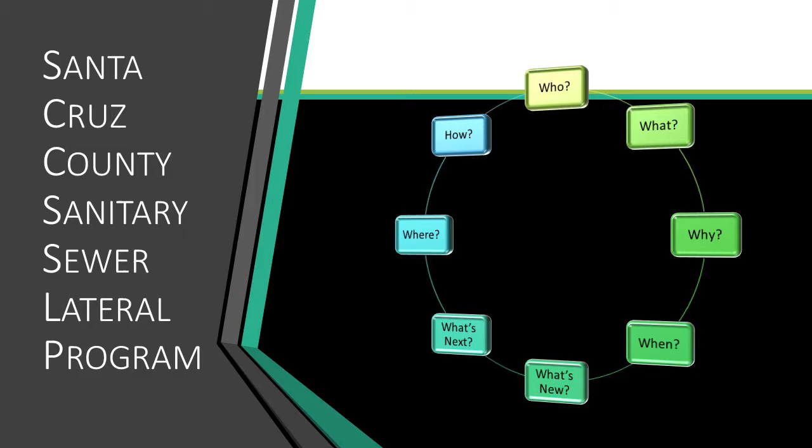Hello. This presentation is to go over highlights of the Santa Cruz County's sanitary sewer lateral program and some changes that we've had that will hopefully improve the program. We're going to go over the who, what, why, when, what's new, what's next, where, and how of the program.

First, I want to talk about who weighed in on the changes we've had to this program. When this program began, it was very new to everyone, and there were a lot of challenges that we had to overcome. And during that time, we had a lot of feedback from different homeowners in the community. We met multiple times with realtors in big groups and also one-on-one to get their feedback. And we met with plumbers who were out doing the inspections and repairs and got feedback from them.

We also incorporated feedback from our own staff who talked about how we could better process all the documents that were coming in and things like that. So we had a lot of people that weighed in on these changes, and the program is running a lot smoother, and I hope it works a lot better for all those involved.

So who does this program affect? Everyone that owns a property within one of the districts that the county manages, which include the Santa Cruz County Sanitation District, the Freedom County Sanitation District, the Davenport County Sanitation District, and the 5 community service areas. Those are all areas where the county manages the sewer system. And so if you have property in any one of those areas, you must comply with the county's sewer lateral program.

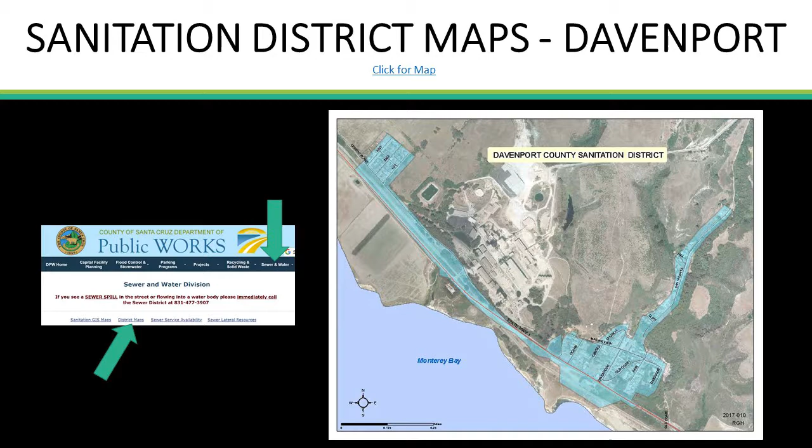The Davenport County Sanitation District is shown on this map. The Freedom County Sanitation District is in 2 separate pieces, so that is an area where you'll definitely want to check to see if the property lies in the sanitation district, or if it is in the city of Watsonville's jurisdiction. And then we have the maps of the different community service areas, or CSAs.

So what is a private sewer lateral, and what is a private sewer collection system? What are the responsibilities of the owner of a private sewer lateral? And what is the county's new and improved sewer lateral program? The code was a bit confusing before we made these changes, and we've worked hard to more clearly define the responsibilities based on what kind of sewer system you own on your property.

So a sewer lateral, the definition of that is: underneath the building and within the house you have what's called the house plumbing or the building sewer. We don't have jurisdiction over that. But as soon as it comes out of the building, past the building face, you enter into what's called the private sewer lateral. And the homeowner or business owner owns that entire lateral until it connects to the public sewer main. And they also own the connection to the main.

So you can see in this diagram, there's the public sewer main down there out in the street. And from where the pipe leaves the house, right at the edge of the building, all the way to where it connects to that main, including the connection, is the private sewer lateral. Maintaining it and repairing it is all the responsibility of the owner of that property. And you can also see there's a clean out. Lots of times there'll be a clean out right by the building. It could also be behind the sidewalk. Sometimes a clean out was not installed.

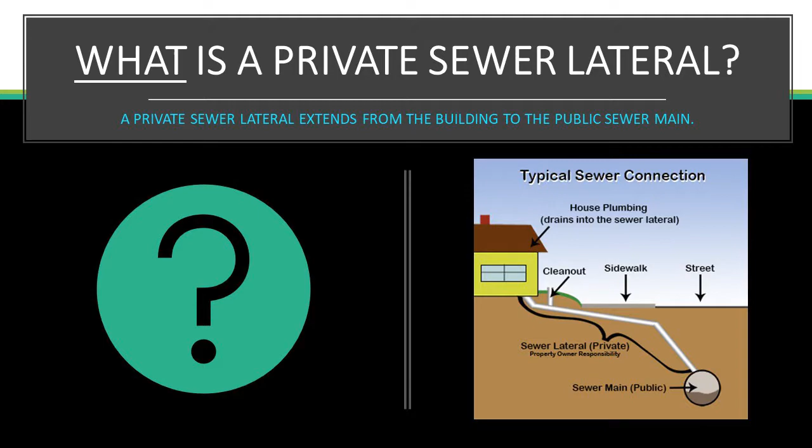We do require a clean out be installed, but sometimes they're not there. And to get your sewer inspection, you may need to have the plumber first install a clean out because you know it's going to be required by us anyway. Or they could take off a toilet and do the inspection that way, or go through a roof vent.

So another definition that's important to know is a private sewer collection system. A private sewer system that serves 4 or more units is called a private sewer collection system. So right here you see this development with all the different lots. They all have little connections to these main lines that are highlighted in yellow. And all those lines are what is the private sewer collection system.

The county does not maintain those lines or repair those lines. Those are the responsibility of the people who live on that larger property. And then that system ties in to our system down in the main line out there in Capitola Road. That's where it connects to the public system, and that's where our responsibility begins.

And so sometimes each homeowner is responsible for certain portions of the private collection system. Other times an HOA or someone's responsible. So that's defined in the CC&Rs for the property, hopefully. And there's a lot of different arrangements for that. But what you need to understand is that there are 4 or more units connected to these systems. If there's less than 4 units, it's called a shared sewer lateral.

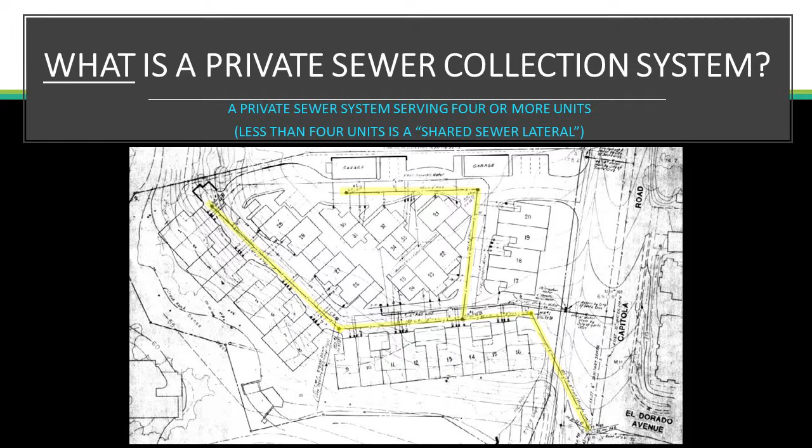So here's 2 diagrams showing a shared sewer lateral. And you can see that both Unit 1 and Unit 2 are tied into this lateral. And our code requires that when an inspection is done on a sewer lateral to meet the requirements of the sewer lateral program, the homeowner needs to video their entire lateral to where it connects to the public main.

So in this first picture, if Unit 1 was going to sell, they would need to video, I have a clean out here outside the house, and they need to video the whole red portion all the way to the main. And they would need to fix anything wrong in that part because they're responsible from their house to the main, unless there's some sort of written agreement between those property owners that says otherwise. But in an instance where there is no written agreement, per our code, that is their responsibility.

However, if Unit 2 were to be for sale and Unit 1 is not, and they need to do the video inspection and repair on their lateral, they would video from their clean out right by their house. They're responsible for the piping outside their unit all the way down to where it connects to the main. So again, it's all the way to where it connects to the main. So you can see there's some overlap there.

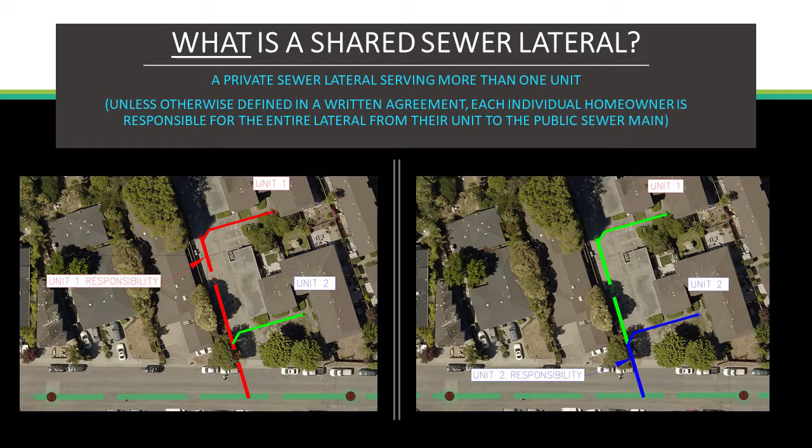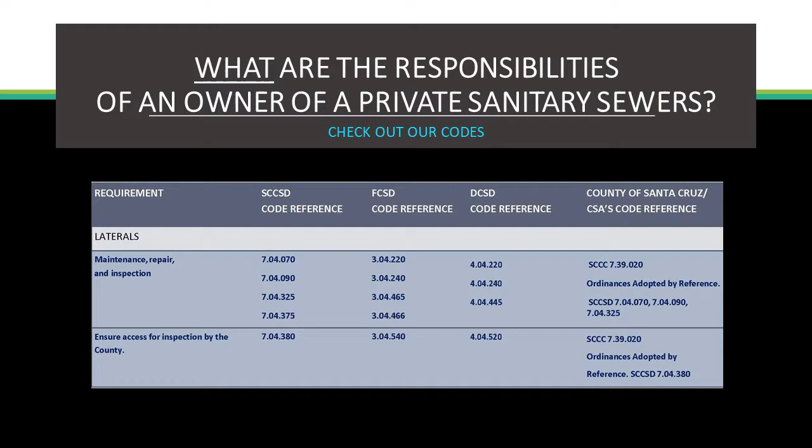So for the owners of private sewers, so this is owners of private sewer laterals, owners of private collection systems, owners of shared sewer laterals, all those people are owners of private sewers. So what they need to do per the code is maintain the private sanitary sewer collection system and private lateral in a fully functioning condition and ensure that the lines are free of cracks, fractures, leaks, inflow, infiltration of extraneous water, root intrusion, and open joints.

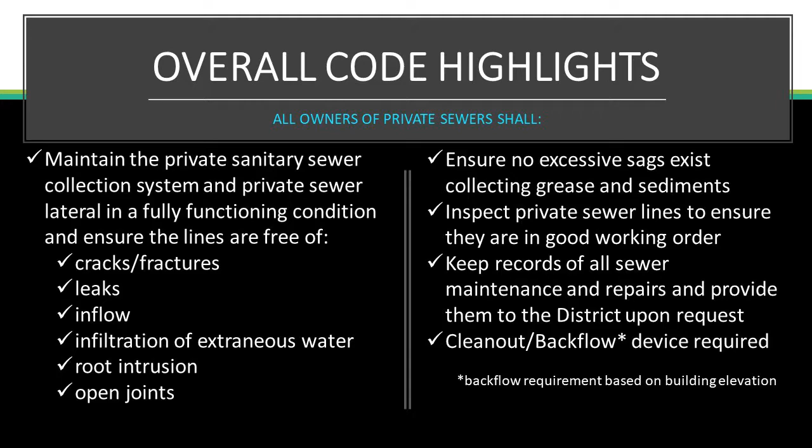They need to ensure that there's no excessive sags that collect grease or sediments in the line because that can cause backups. They need to inspect the private sewer lines to ensure that they're in good working order, and then keep records of all the maintenance and repairs and provide them to the district upon request. And a clean out is always required, and a backflow device may be required based on building elevation. So I'll talk about that here with our next slide. So these are some pictures. This top one is a clean out before it's been backfilled.

You see the sewer lateral coming across the lawn with the clean out sticking up there. And the clean out is a way for the plumbers or the homeowner to access the line, to do inspections with a camera, or to flush it out, snake it, things like that. It's also a place where if there is a problem in the sewer and sewage starts to back up, hopefully it will back up out of there.

And so one thing you can do to protect your property is install a backflow preventer. And we require these when the lowest finished floor elevation, so your first floor or your basement if you have one, if it's not higher than 12 inches above the nearest upstream manhole, you need a backflow preventer. And this helps keep sewage out of your building or your residence if there is a problem in the line

that causes a backup. So there's a flap that you can see in this diagram, and as the sewage backs up, the flap closes, and then the sewer will back up either out of the clean out or some other place that isn't inside your house. So we always require that every house has a clean out, and then again, based on elevation, a backflow preventer might also be required.

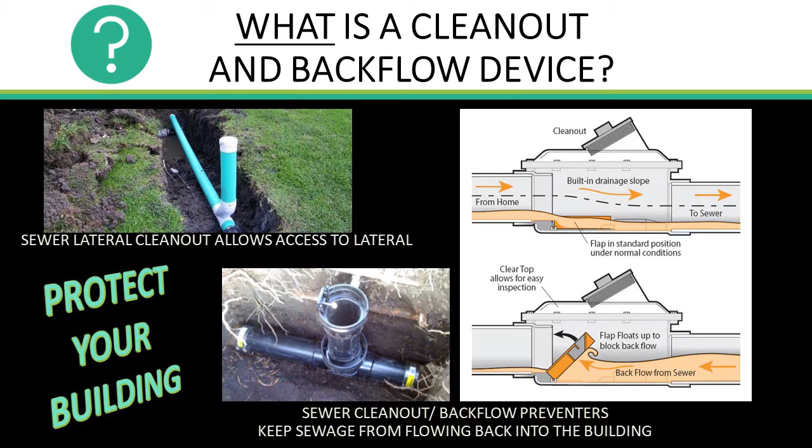Now, what is the county's sewer lateral program? So it is verification of proper sanitary sewer function through video inspection by a licensed plumber with completed lateral inspection form, county review of the provided video and inspection form, required repairs by a licensed plumber, and county approval.

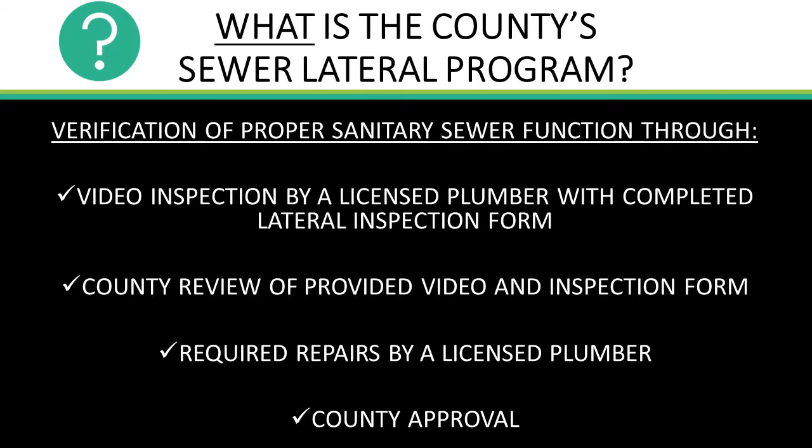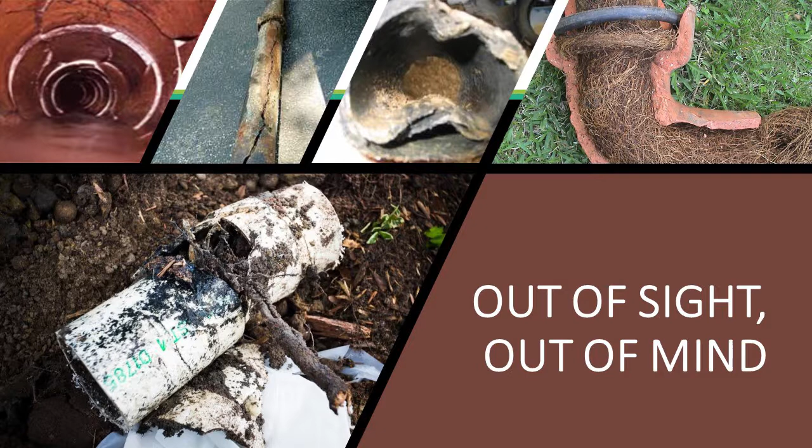And why? Why does the county need a sewer lateral program? And why does the county care about private sewer laterals? You might think this because it's on your property. It's your responsibility to repair and maintain it, so why does the county get a say? And the reason is that things that are out of sight are out of mind, and they are deteriorating and they're causing problems for the overall system.

So here you can see some things that could happen. There's a clay pipe that's crushed. It could have been backfilled improperly and maybe in a shallow trench and driven over by vehicles, or there could be a tree that's causing it to fracture. Then you see a cast iron or steel pipe that has rusted out.

You see this next one is Orangeburg. It was a pipe material made out of tar paper that they thought would be a good idea, but it really wasn't. And everywhere it exists right now, it pretty much needs to be replaced because it's just all falling apart. And then you see this clay pipe that has just been completely filled with roots.

So roots will look for any way to get in through a crack or a fracture or through a joint that isn't done well. And once they get in, they're thirsty, they're looking for the water, and then they find the water along with a lot of other yummy stuff in your sewer, and they grow and grow and grow, and they can fill up the pipe like this.

And some people might say, well, my sewer lateral is made out of plastic. It's PVC or ABS, so roots aren't a problem. And while they are usually really good pipes that hold up and don't have much chance for roots to get in any cracks, if there's an improper joint or other defect in the pipe, a root still could get in and cause a problem.

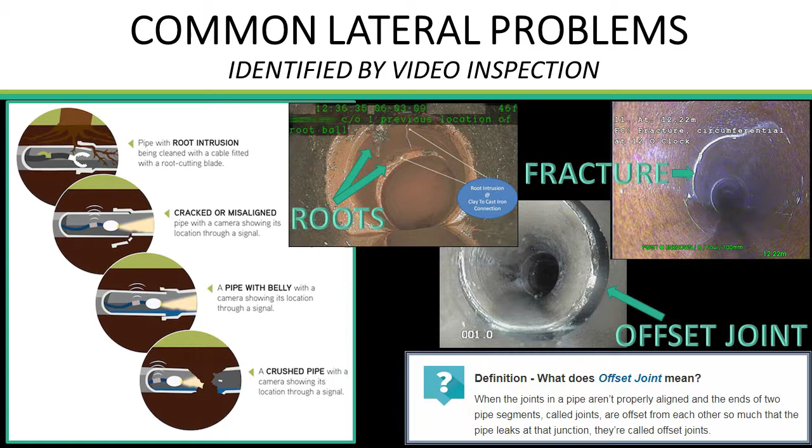And why does the county care about the private sewer laterals? Well, we need to eliminate inflow and infiltration. So of course we also want to eliminate exfiltration, which is sewer getting out into the groundwater. But it's also important for us to eliminate the inflow and infiltration.

So inflow is shown in this diagram in black. It's direct water just flowing into the system from stormwater. So there's a roof drain connection, there's a foundation drain connection, there's an uncapped cleanout that water can get in, and a faulty manhole cover. There's even a cross connection out there with the storm drain.

So the storm drain water is going directly into the sewer. So these are all cases of inflow. We're also trying to get rid of infiltration. That's when groundwater can seep in through different cracks in the pipe or faulty joints. So they're shown here in the diagram in the white text.

It's the broken side sewer where you have the root intrusion, because if roots can get in, water can get in, and also sewage could get out. And then there's a faulty lateral connection. A lot of times that is where we see repairs needing to happen, where the lateral connects to the sewer main. It was done a long time ago, or wasn't done properly, or the materials used may have been an old technique or something that isn't watertight. And so that faulty connection could also be a source of infiltration.

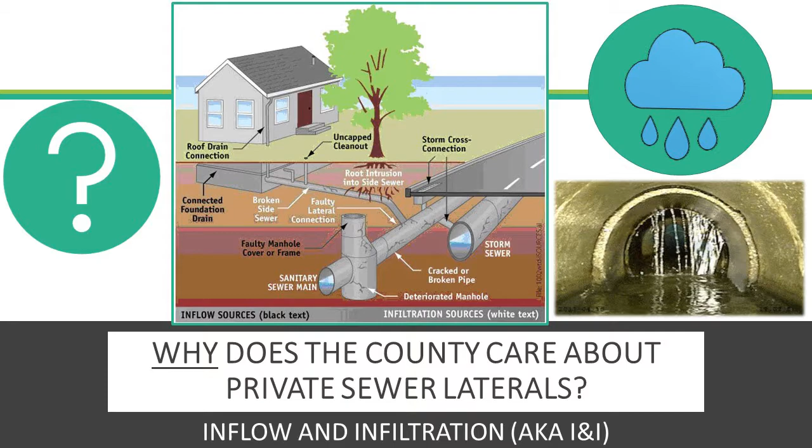So it's really dangerous for our environment, for public health, and also it's just really expensive because we have to size all of our sewers for all this extra water. We have to maintain these huge lines, and then we have to pay either the City of Watsonville or City of Santa Cruz to treat all of this sewage, and it's much larger quantities than what we call our dry flow, which is the flows that we see in the summer months when there isn't rain.

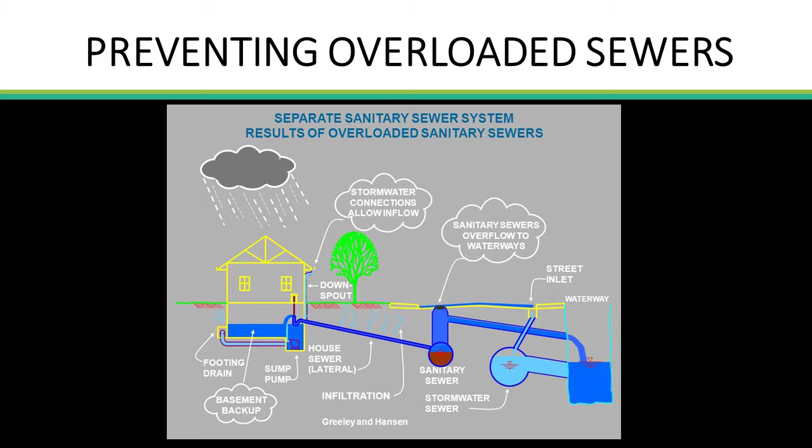If the water gets up to the inflow pipe elevation, then it can spill out the manhole in the street, which is what you see in the next picture. And of course that can go into the storm drain systems and pollute our waterways. And it can also cause backups and go into your residence. So there's some really nasty sewage there in your bathtub. You don't want that. And it can be much worse than that. At least that one was contained to the bathtub and didn't come out all over the floor in a basement. So that's the reason you want that backflow preventer we were talking about earlier.

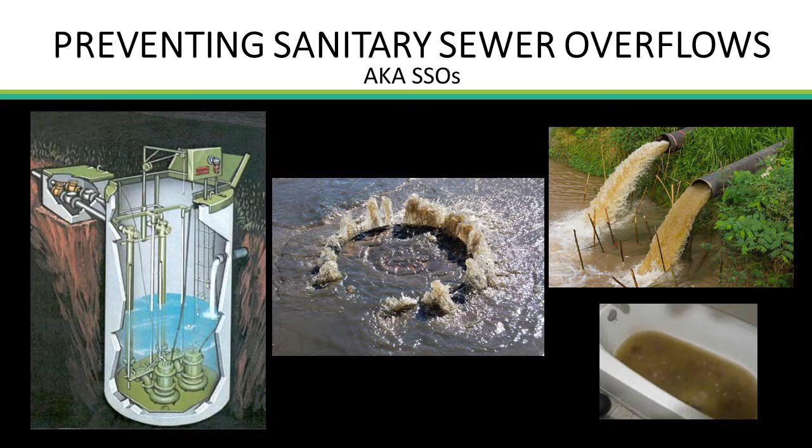So when must owners comply with the sewer lateral program, and when are videos of laterals required? So owners must comply now. This requirement was put into the code for the Santa Cruz County Sanitation District in 2006, and the other districts and CSAs followed suit in 2011. And now, based on us really starting to enforce the code back in 2018, we've done these revisions and they are taking effect in 2019. The Santa Cruz County Sanitation District code revisions go into effect on September 14th of 2019, and the rest of the districts and CSAs will also go into effect shortly after.

When are the videos required? Video inspection and all required repairs must be completed prior to the close of escrow, when connecting to an existing lateral, which would be like if you had a building that had been demolished or abandoned and you're going to build a new building on that site and you want to use the existing lateral, or maybe you have an active building on a site connected to a sewer lateral and you want to build something and connect it to that existing lateral. We require that you video that lateral to see that it's in good condition for your new connection. And we also require the video inspection when you're going to do a remodel or a building addition on your property.

So some highlights about the transfer of responsibility. The requirements of the lateral ordinance need to be disclosed by the seller to the buyer at the time of escrow. And the seller is responsible for obtaining the video and the completed county inspection form from the licensed plumber. The county will then review the submitted video and form and determine what repairs are required. The buyer should make themselves aware of the cost to make the required repairs.

And then the buyer and seller need to sign the transfer of responsibility form if they agree to it, saying that the buyer will make the repairs. The county must accept the transfer form, allowing that transfer of responsibility from the seller, because in the code it requires the seller to make the repairs, to the buyer prior to the close of escrow. Then the buyer, once the county accepts that form, has 30 days from the date the county accepted the transfer of responsibility form to make the repairs.

The county has started using Box Drive for document sharing and document collection. So this has been working really well for us and really well for the plumbers and realtors and homeowners involved, because letters are no longer needing to be sent out. Things aren't getting lost in the mail or sent to the wrong address, it just allows as many people that need to see the documents in real time.

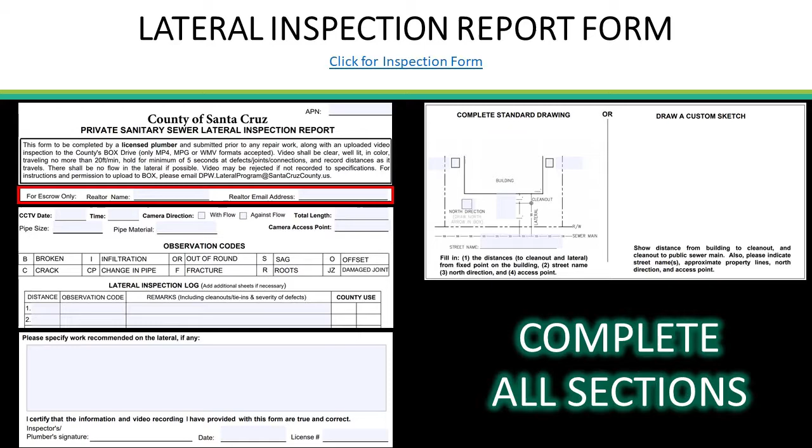And the sketch is super important to us because the county doesn't currently have very many records of where people's sewer laterals are. And it's a common question we get from homeowners all the time: where is my lateral? Why don't you know where my lateral is? Well, as these reports are coming in, on the sketch, there's a requirement to write the distances from the edge of the building to the lateral, where the clean out is along the line of the lateral, and how far the clean out is from the main and the street, and all that. So it's a great way for us to just keep a record of where the lateral is, and it also helps us understand the video that we're watching.

So once the video is uploaded and the comment form is uploaded and the county reviews the plumber's comments and video, then we write our review of that video and form. And so we will mark on here if there needs to be a re-video for any reason or if the form is incomplete. But assuming that the form was completed by the plumber and that the video is acceptable, then we will determine either that the lateral requires work, and we'll write what that work is. It could be a complete repair of the sewer lateral. It could be a spot repair. It could be lining. We could allow lining of the lateral to just seal up the joints along the length of the lateral, something like that.

Or it could be that no work is required at this time. That doesn't mean that we're guaranteeing anything about the performance of that lateral. It just means that we're not requiring any work at this time for it to comply with the escrow program. There's also a box that says lateral work recommended, and we would check that if the plumber's recommended something that we think is a good idea, but we're not necessarily going to require it at this time. And then we can also just check down here about what district it's in.

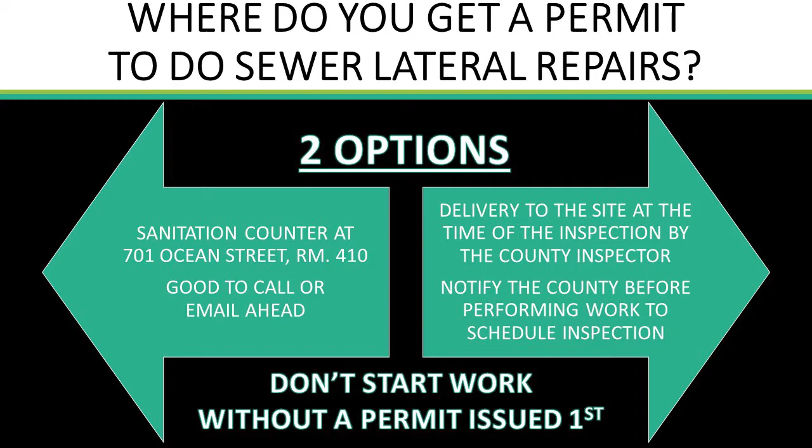And if it did, we're going to stamp it, sign it, and then this is your official document that says that you have complied with the lateral program, that you did the repair necessary for the transfer of ownership of this property, or you've done the repair necessary so that you can connect a new building or proceed with your remodel or whatever the case may be. So this is the document that you would get stamped and signed to be included with the escrow documents or with your other permitting documents.

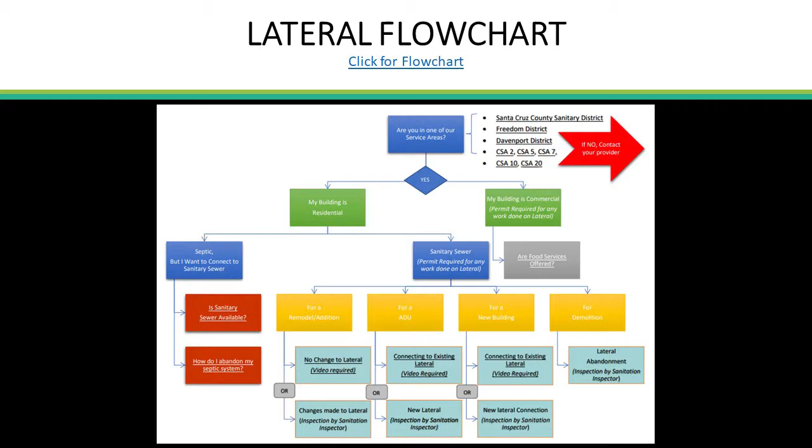Some of our resources include this flow chart that shows when you need a video. You can also see our list of approved contractors. So these are contractors who have already submitted their insurance information and other required documents to the county so that they can work in the public right-of-way without getting an individual permit. They're covered under a blanket permit.

So these are not for contractors working in the city of Capitola. They will need to get an encroachment permit from the city of Capitola. But in other areas of the county, if the contractor's on this list, they can do work in the public right-of-way. So that's like within the road, the sidewalk area, those types of areas.

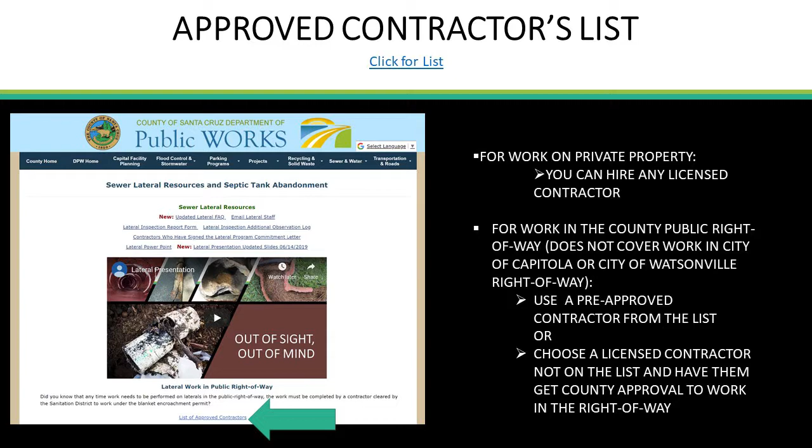However, if the sewer lateral break only occurs on the private property, you can have any licensed plumber do that work. And really, you can have any licensed plumber work in the public right-of-way as well. They'll just have to come to the county to get an encroachment permit and submit their insurance documents and things like that. So the fastest way to get the work done in a public right-of-way is to choose a contractor off the list, but it's not the only way.

And so we also have another list. So we had plumbers come and they met with us. They gave us feedback on our program, and we educated them about the requirements for the videos, for filling out the form, and we talked to them about how important it is that they meet these requirements so that homeowners aren't having to get the videos done multiple times or having to resubmit forms because they weren't done properly.

And the contractors that did this training with us voluntarily signed this commitment letter saying that they were going to provide videos and inspection reports meeting the county's requirements. So if you're looking for a plumber that has good background knowledge on our program and has signed this letter, you can get a list of them there. But any licensed plumber is able to do the inspection and the work.

So here's some ways that owners and plumbers and realtors can comply. And we can also talk about how the county and city's programs differ, how you can help, and how you can get more information. So how do owners comply? Owners can comply by maintaining their private sewer lateral, installing a cleanout and backflow device where backflow devices are needed, obtaining video inspections as required, and starting the process early.

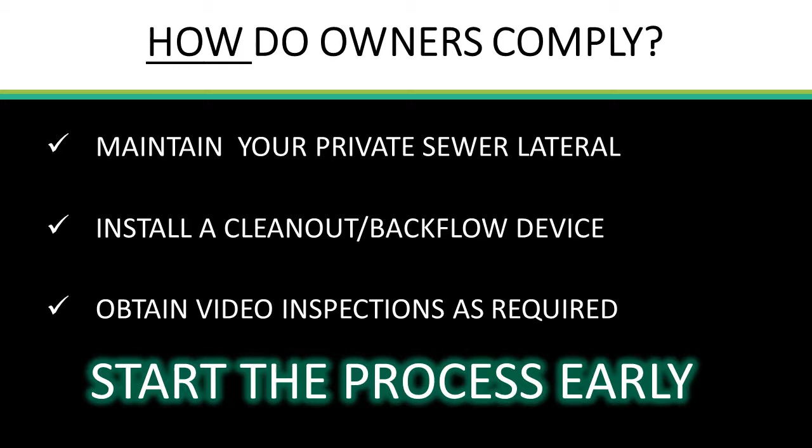And how do plumbers comply? So they need to provide videos that define a starting point. When we watch the videos, it's just a camera starting in a pipe, and we don't know where that location is. We don't know if they started at a cleanout up near the house and are going down to the sewer main, or if they're starting at a cleanout near the sidewalk and going back up towards the house and then coming back down to that cleanout and then going back out to the sewer main and then coming back up to the cleanout.

It can be very complicated, so we don't know that unless a starting point is defined. And then we need to know the distances that the camera's traveling, because if there is a break in the pipe or something else that needs repairs, we need to know at what point along the lateral that repair is required. So the plumber can go out and make a repair just at that location if that's all that is required.

They need to film the entire lateral from where it leaves the building to the public main. They need to film it at a speed maximum of 20 feet per minute. And this is because we don't want to be guessing about anything. We want to give quality reviews and not require more work than is necessary. So if a camera is flying by a dark spot on a pipe, we might think it's a hole in the pipe, where really it could just be some guck or something stuck to the side of the pipe.

So if it goes slow enough for us to see it, and the next point is that it's color and well lit with a clean lens, then we can have a better idea of what's really there and give a realistic review of the sewer and not be guessing, because we really don't want people to pay for repairs that aren't needed. And we do know that the lens gets dirty once it's in there, but if they could start with a clean lens, it gives us the best shot at getting a good, clear video.

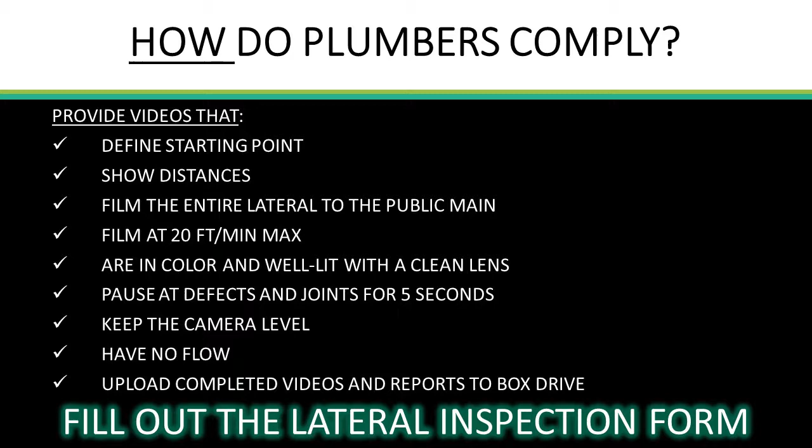We need to have no flow in the lateral when the video is being done, and this is because anywhere where there is sewer flow, we can't see that portion of the pipe because it's covered by whatever is under that water level. And then videos and reports need to be uploaded to the Box drive, and they need to fill out the inspection form completely.

So how do realtors comply? They need to know the county's requirements, and realtors have been doing a really good job of coming to meetings with us to learn these requirements, and hopefully they're spreading by word of mouth, and hopefully they'll be able to just know what they need to tell their buyers and sellers, and we have some new forms to help them do that. So we also need to notify the sellers and buyers early, delay escrow closing if requirements are not met, stay informed, and start the process early.

So how do the county and cities programs differ? These are just some highlights, and it's not exhaustive at all. And really, you need to figure out which jurisdiction you're under and then look up that particular jurisdiction's requirements. So if you have a property in one of the county's districts or CSAs, you need to get a licensed plumber to video the lateral and complete the county inspection report. It can be any licensed plumber. The city has a specific list you must hire someone off of. It's their certified sewer inspectors list.

And then those inspectors provide scores on the lateral. At the county, we have our NASSCO certified county staff review the videos and make the final call on the required repairs. NASSCO is the organization that shows how to code and score pipes. So our staff has been trained in that, and we use that knowledge in determining which laterals require repairs. The city is relying on their certified sewer inspectors, who I believe are also NASSCO certified, to make the scores, and then the city's using those scores to determine which pipes need to be fixed, and I believe they're only reviewing the videos if there's been a spill.

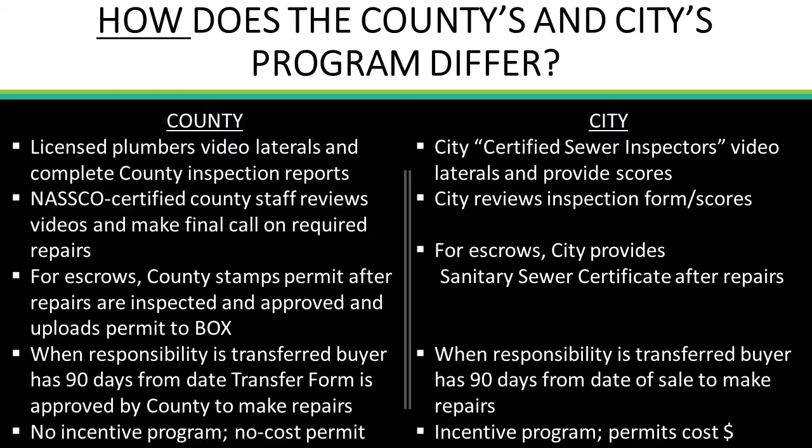And the county has no incentive program, but we do have no-cost permits. The city has a rebate program where you can get some money back for the repairs you do. And the permits used to cost money, but I recently heard a rumor that they no longer cost money. So you can check in with the city on what the status is for that.

So how can you help? You can spread the word, provide feedback and suggestions, and show patience so we can all work together. So, we really do welcome feedback. I know that we've made a lot of changes, we've had a lot of improvements, but I don't think that we're done improving it. So please let us know what would help. Let us know what information could be changed on our forms or on our website or in our process. And as we start to involve the HOAs, I'm sure we're going to have more changes that need to come from that process.

And then in showing patience, our staff is working really hard on this. We all had full-time jobs at the county before this lateral program went into effect. So we're doing all this work, which is a lot of work on top of our normal workload. We did not hire any extra staff, and the county makes no money off of this program. So it's a big thing that we're doing here, and we really appreciate your patience with us as we try to serve you. So hopefully we can all just work together and make the program better.